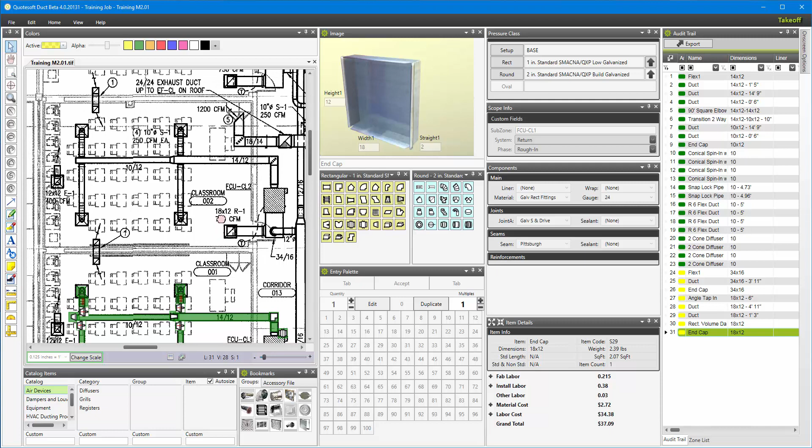As shown in the program overview video, scaling and taking off ductwork items in Duct 4.0 is the same as using Legacy. Simply pan or zoom to the system where you want to start your takeoff and select your first item. For this case, we'll use a flex connection size 14x12.

Selecting the flex connector in the rectangular palette will show it to you on the screen above. You can then set your dimensions by clicking in the entry palette.

Placing the item on the plan file will automatically continue the same color and scope information from the previously used item. If you wish to change it beforehand, simply change the color using the color palette and also change the scope information. In this case, we'll change to Classroom 2, go back to supply, and then place the first item.

The second item will be straight duct. Selecting the duct will give you the cursor for scaling. Click the beginning of the run. While scaling, you'll notice the feet and inches changing in the item image.

Simply click to end the run. Click to begin the new run, pull the mouse across, and click to end the run again. You'll notice when scaling, standard lengths and non-standard lengths are being split into two duct runs in the audit trail. If you zoom in, you can also see this with the annotations.

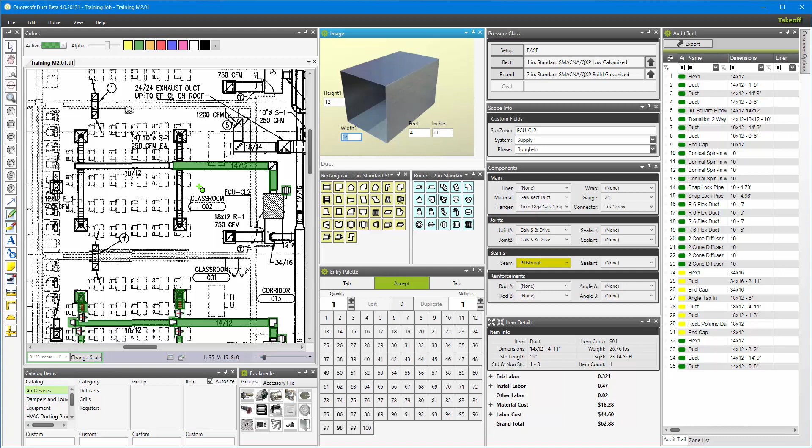Clicking the select button will allow you to select the annotations you've placed. I'll select the standard length run. When selected, if you look at the audit trail, you can see this is the standard length run—a total of 3 standard lengths of 14 by 12, which is 14 feet 9 inches.

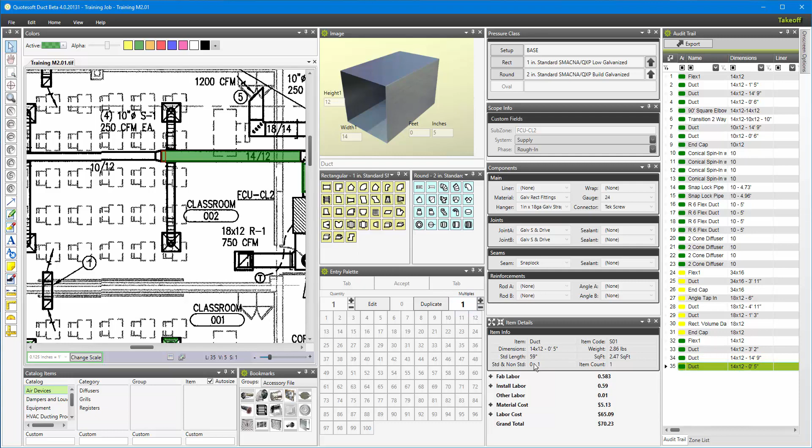There is a non-standard length immediately following. Selecting it will update the information. You can see this is one non-standard length of 5 inches.

You'll notice that when I place fittings, they have a colored background which matches the active color. So if I select the elbow and place the stamp, you'll see it has a green active background.

If I click select, then click on the elbow, I can change the background color and it will update with it. The background colors are transparent so that they update to the selected color you have for your system.

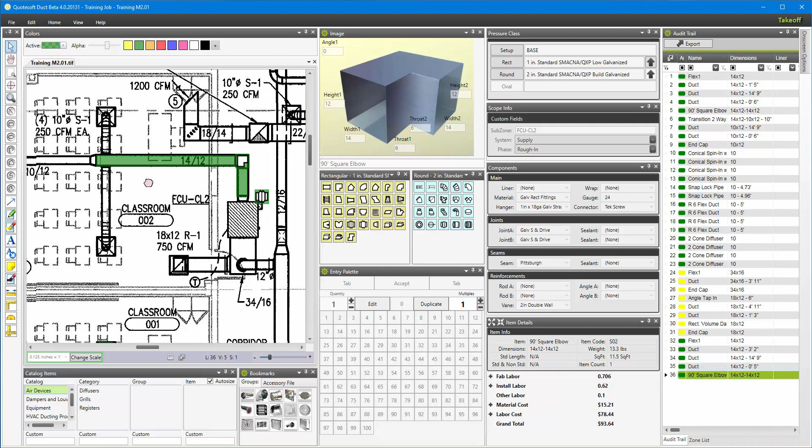I can then pan across and continue with my takeoff.

Selecting a two-way transition will automatically select the width on the outlet side. The inlet side is filled with the previous dimensions, so all you have to worry about putting in is what sizes you're going to. In this case, 10 by 12.

Place the item on the plan file and select the next run, which would be duct. Click the beginning and you'll see the feet and inches highlighted, as well as the standard and non-standard count in the item details information.

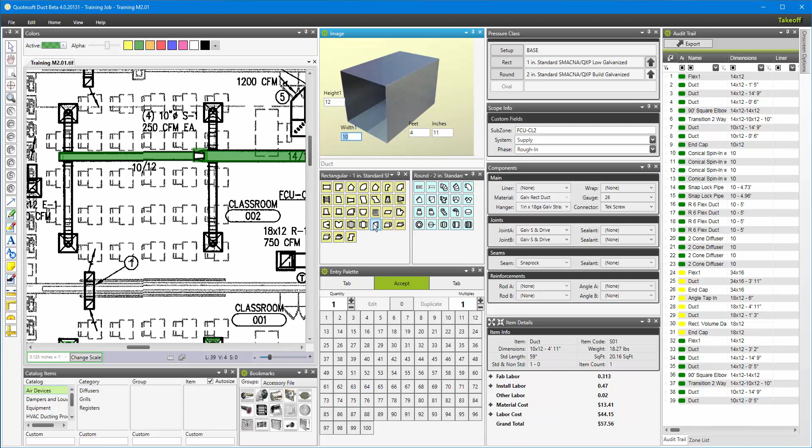Select the end of the run, and it will split it into 2 runs in the audit trail. Go ahead and place your end cap at the end, and you've completed the duct run on the supply side.

Now we can take off the accessories. The accessories all come from the catalog items palette. In the catalog's item palette, you'll find the HVAC duct products, and within that, an accessory snap-lock file.

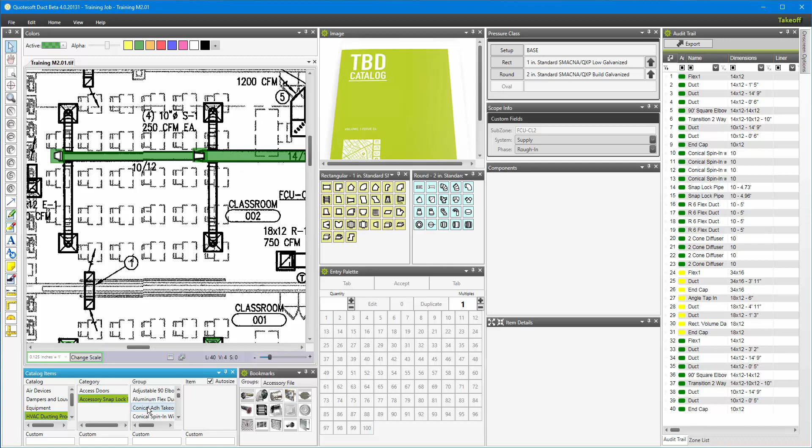You have all of the different groups that were available in the legacy software: adjustable 90, aluminum flex duct, conical adhesive takeoff, conical spin-in with damper.

By selecting these, you'll get an item list, and the picture will update. You can also create bookmarks that go directly to an item. Instructions on how to use bookmarks will be further down the page in the advanced takeoff section. I've already created a handful of bookmarks to make it quicker for us to take off accessory items.

We'll start with the conical spin-in with damper. I'll select it, and the first thing you have to do is put in the starting diameter. In this case, I'll use 10 inch.

Now you can place the item on your plan file and keep moving from location to location, placing the item, and then select your next item.

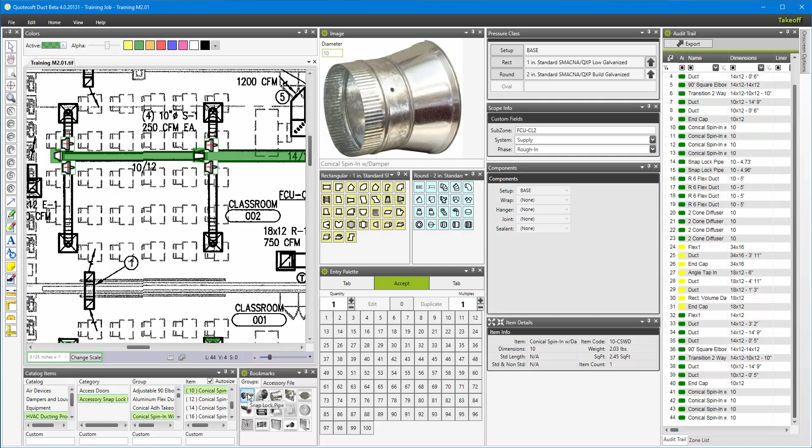We'll use snap lock pipe. You'll notice that the 10-inch diameter was automatically carried over for me, with a standard length of 5 foot. Scale the duct run, then move to the next one.

Move on to the next item, flex duct. Select the flex duct in the palette and place it where you want to have it.

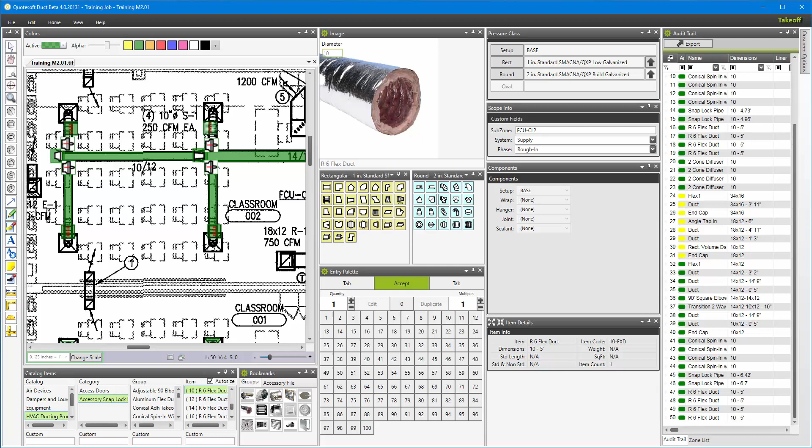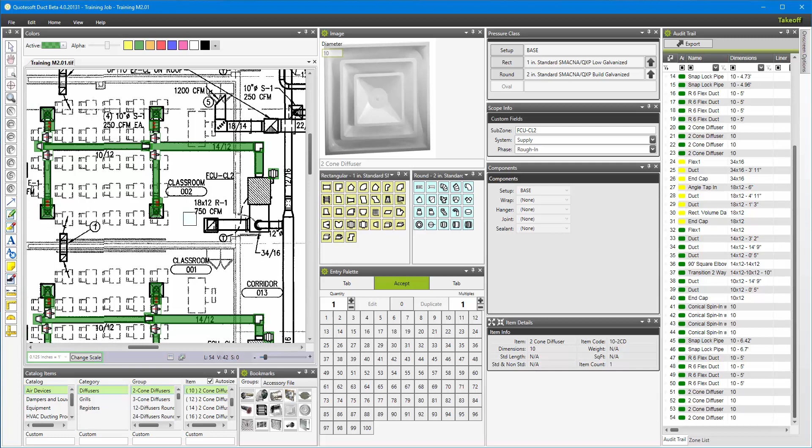Next up would be a lay-in diffuser. Select the diameter that you want to use and place it over the symbol on your plan file. I'll roll the mouse wheel to zoom out and double check that I have all of the supply side, which I do. Now it's time to start the return.

In order to do this, I need to select the very first item. The first item is going to be another flex connection, 34 by 16. Select the item in the rectangular palette and change the dimensions. I can then change my active color as well as my scope information. I'll change to yellow and update the scope to say return for the system. Place the item where I want it to appear on the plan file. Now scale the ductwork.

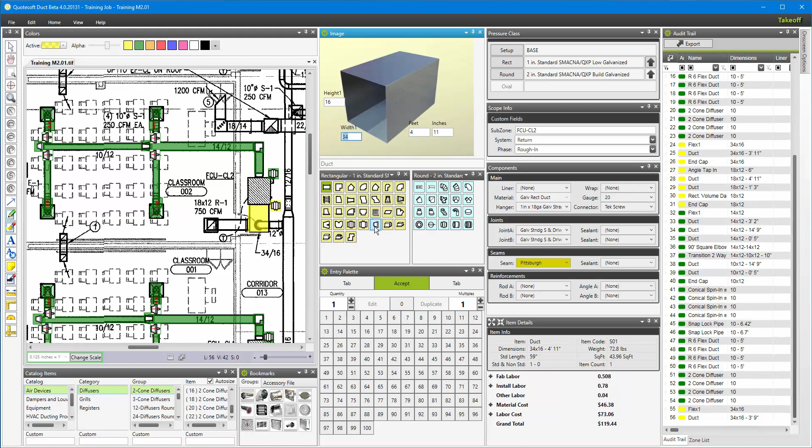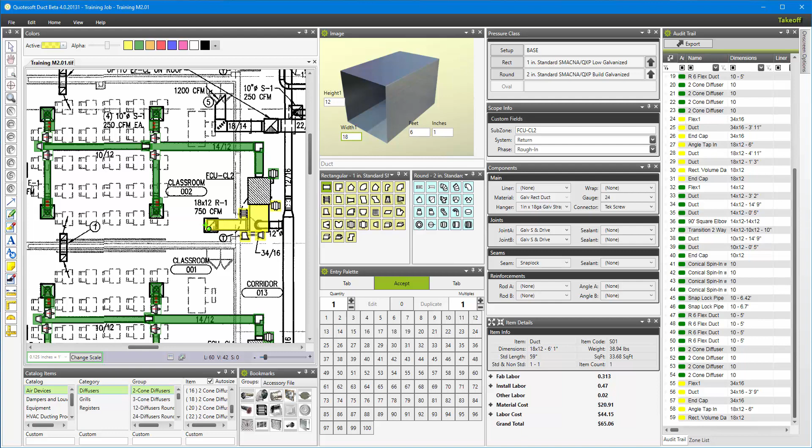Continuing with the same methods that I used before, I can quickly go through and do this takeoff. All of the items that are available in legacy ductwork are going to be available to you in Duct 4.0 Takeoff. Volume dampers, as well as taps, should all be available, and scaling ductwork should use the same methods as it did before. When you have all of your items taken off, you can quickly glance at it in your audit trail, select an item, and you'll notice that it highlights it on the plan file. It was highlighted there.

A feature that's new to the Duct 4.0 Takeoff program is the ability to add scope fields on the fly. Let me show you how to do that. I would like to add a fourth field called area, and then break each of these up by their classroom, so I don't have to just use the subzone.

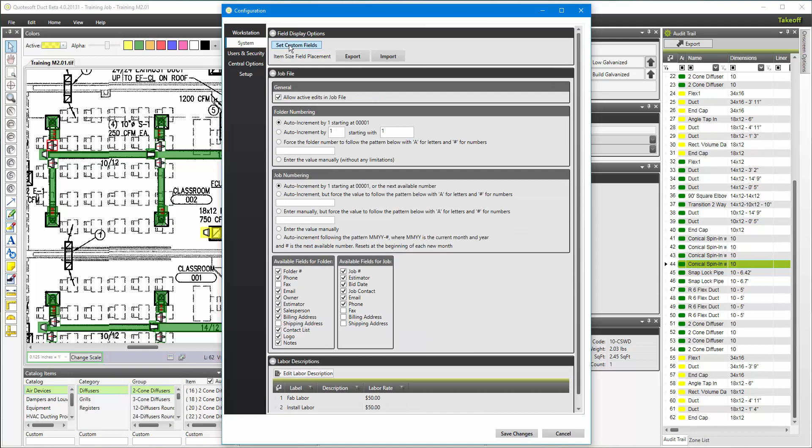To do that, go to the Edit drop-down menu, select Workstation Options. From here you can go to the System tab and set your custom fields. You can see that I already have 3 custom scope fields set up. I'm going to add a fourth. Type in what I want the label to be, and then click OK. Now hit Save Changes.

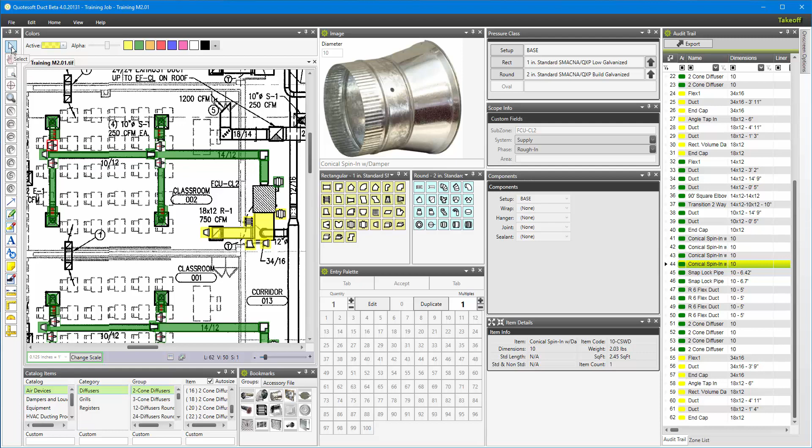You can see in the scope window, if I slide the components down slightly, we have a new field called Area. So I want to update the system that I just took off to say Classroom 002. Using Select, I'm going to drag a box around all of the items that I've taken off and right-click anywhere inside the box that's drawn around those items. Choose Global Edit. What I want to do at this point now is add in what I want the area to be.

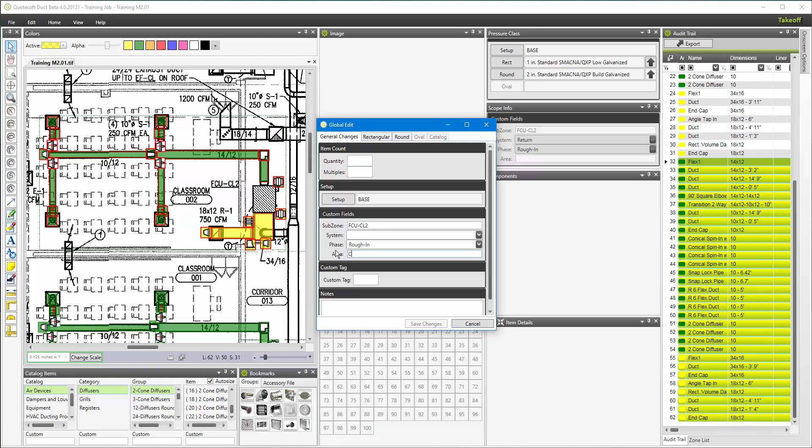After typing in what you want the area tag to be, you can then hit Save Changes at the bottom, and your items will be updated. Now you can see in the area field, Classroom 2 has been applied to all these items.

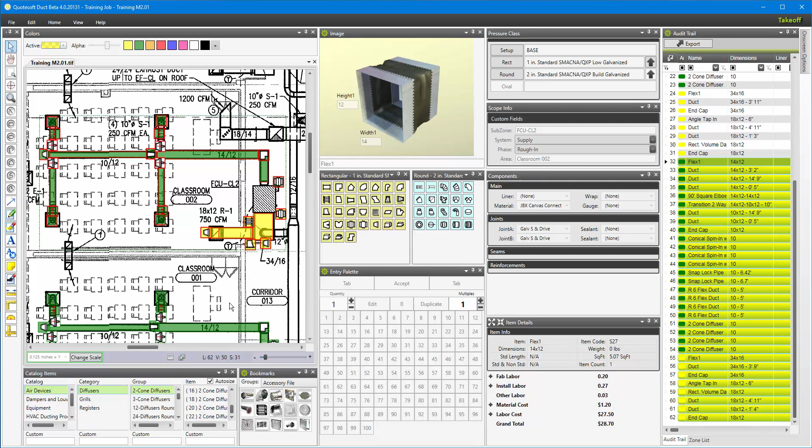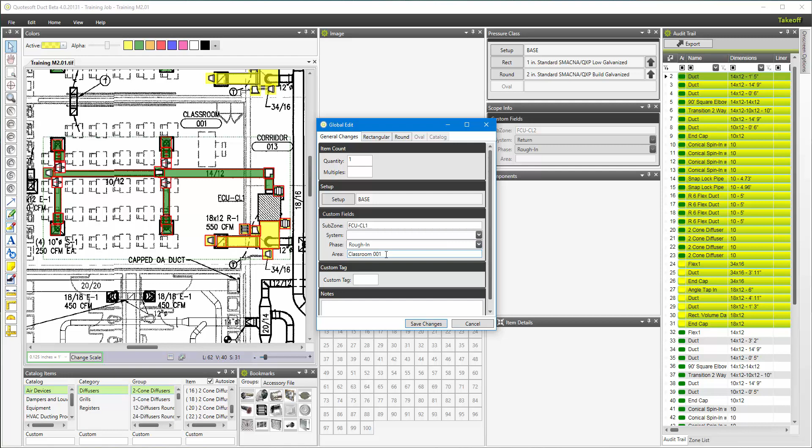If we pan down to the first system we took off, I can do the same thing. Select all these items, right-click Global Edit, and change the area to read Classroom 001. Now clicking Save Changes will update all of those items as well.

You can also make all of the usual changes within the Global Edit as you could with the Global Wizard in the legacy software. Right-click these items and choose Global Edit. Instead of making a change to scope information, I'm actually going to click the rectangular tab at the top. This will allow me to make changes to the components individually. For example, I'm going to go ahead and change all of the hangers on the rectangular items over to be 3/8 rod and 1 5/8 unistrut. Of course, at the same time, I want to change the connector, and I want to change that connector over to a 3/8 beam clamp.

By hitting Save Changes at the bottom, I will be able to validate all of the changes that I have made by selecting the items and looking at the hanger that was applied to that item. I can also use the audit trail and scroll over to the side and look for the hanger column, and I'll be able to validate that the items actually got the hanger added to them. Remember, the audit trail can be customized, and you can add or take away columns as you so choose. So you can see the item that has been selected is using 3/8 rod and 1 5/8 unistrut and a 3/8 beam clamp.

Global Edit, which was the global wizard in the legacy software, is a very powerful tool to allow you to make the changes after you've already done your takeoff. This would conclude the introductory video to Takeoff.